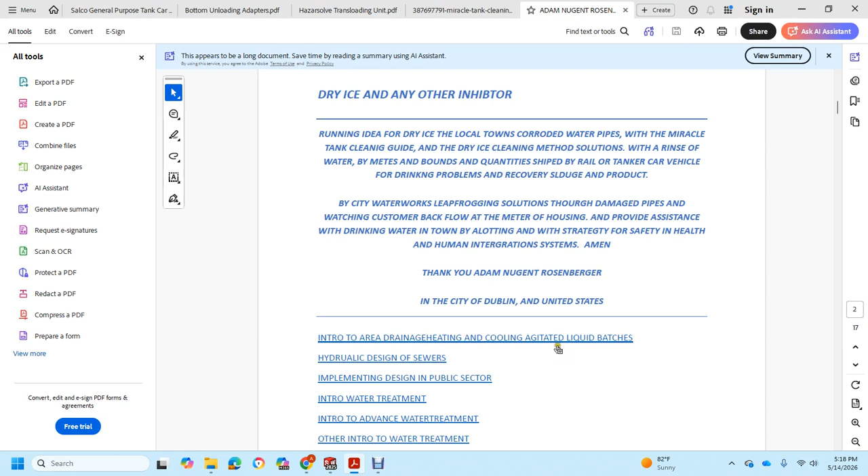Okay, so this is a way I built. It's a PDF, and it builds a web page out of your PDFs. But I have several different YouTube videos, like intro to draining, heating, and cooling, design sewers, implementation, design public sector, water treatment, advanced water treatment, seepage drain, treatment, disposal treatment, steam boiler, water system pumps, operation pipes, cleaning industrial water, flow measure pipes, ducts, and valves.

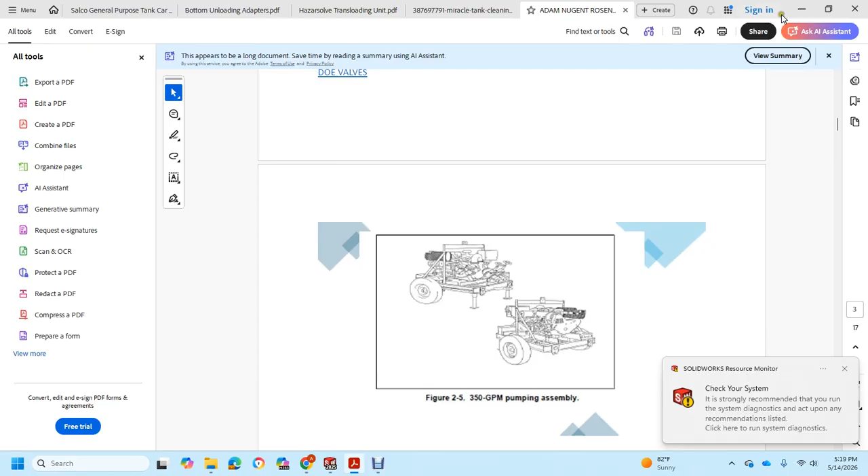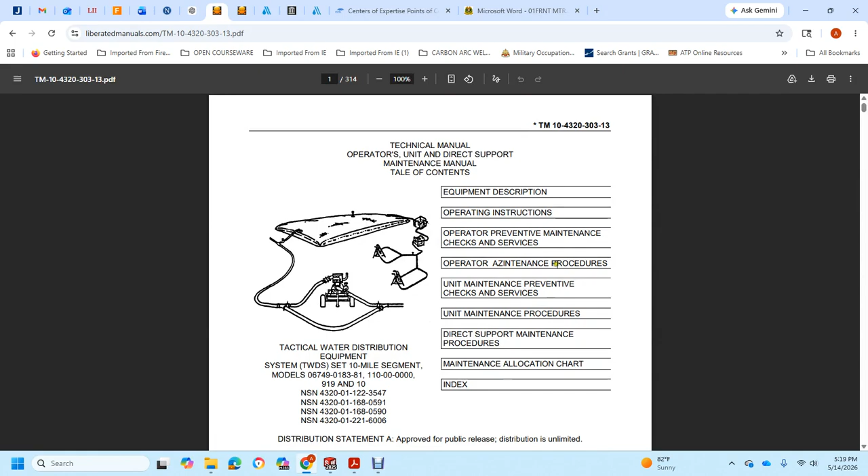So let's look at some of the pumps we have. I have my SolidWorks open. We'll go to the Liberated Manual, search for water pumps. As you can see, they have pumping units. Some of these are the page numbers on the side, such as water 600 gallon assembly, pumping assembly. We have a tactical 10-mile segment, water distribution system 10-mile segment, and so this would be leapfrogging the gridiron, and it shows a water kit for the operation instruction, preventive maintenance, operator maintenance, unit maintenance checks, appropriate design, distributed for public release unlimited, and we'll download that real quick.

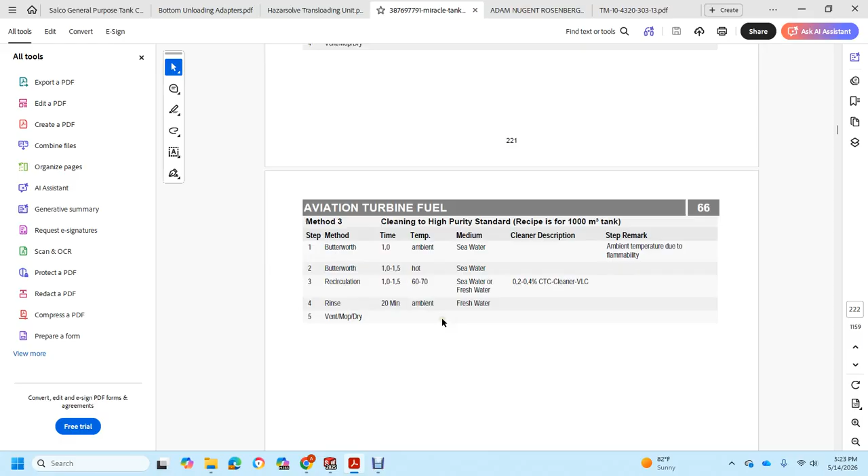So these are the cleaning agents. We have operation, fire, exits, reaction, emergency response, tank inspections, troubleshooting, zinc and viscosities, and more. So we look up the scale and corrosion control. We look up, say, let's do find text, what was it, carbon dioxide. That's what we want. I'm just going with this one real quick. We'll just leave that at carbon.

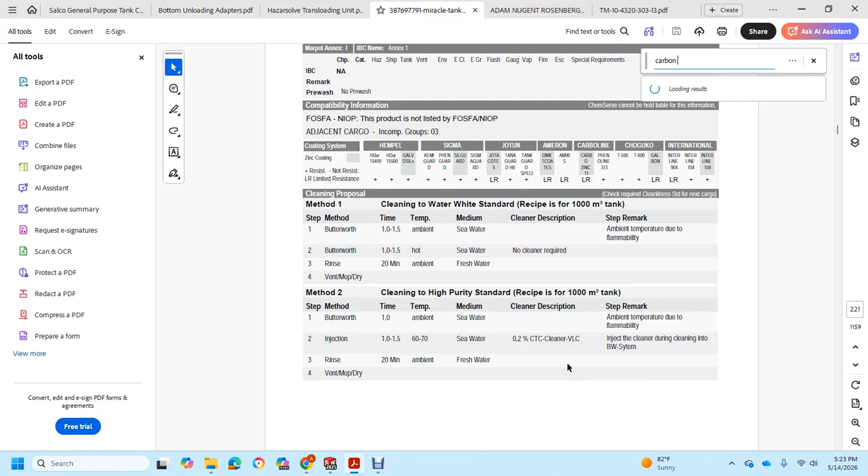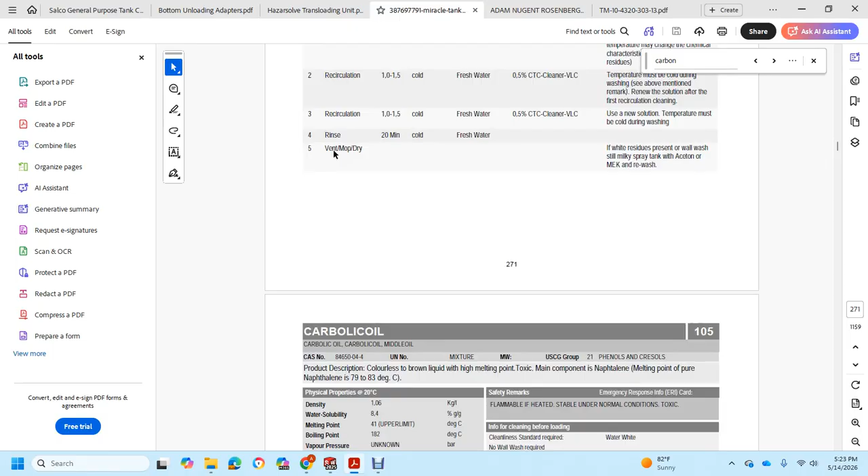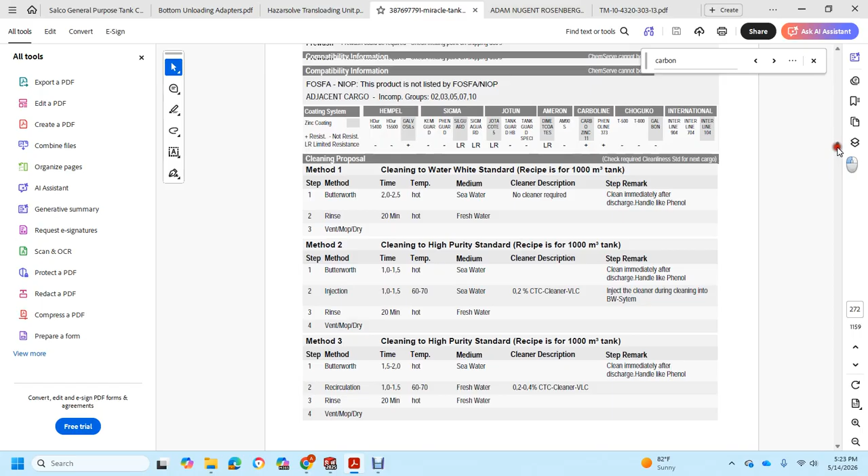Alright, so I didn't look it up, but I think we might have passed it. Carbon was spelled in C. Carbon, let's see, carbon tetrachloride, carbon dioxide. Anyways, it will show the CAS number, UN number, mixture, volumes, kerosene, shows the cleaning flash points, the hazmat, how much it takes to clean. These are the sheets. So there's Miracle Tank Cleaning. And I showed you the small, we'll go back over to this one.

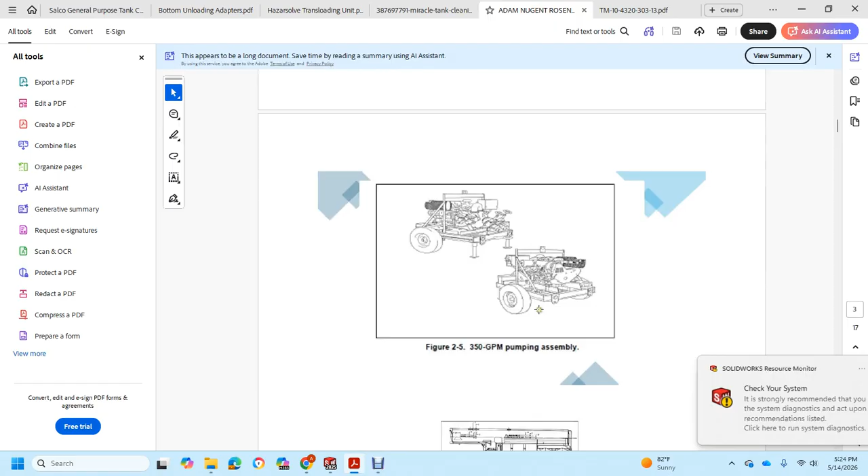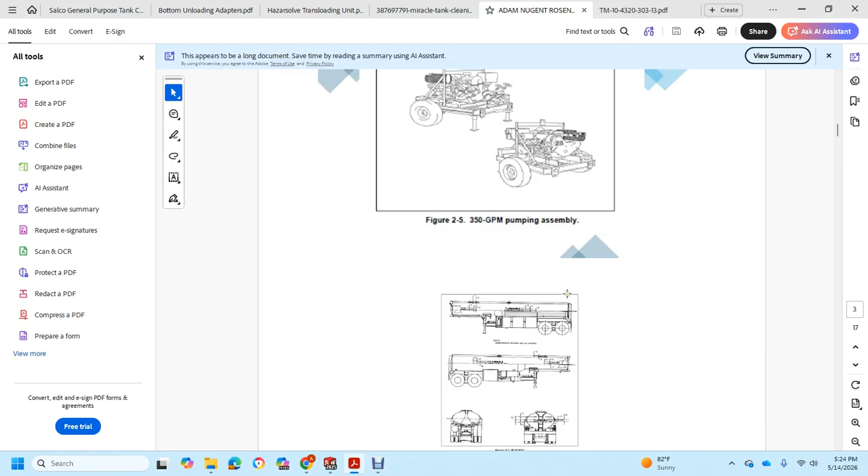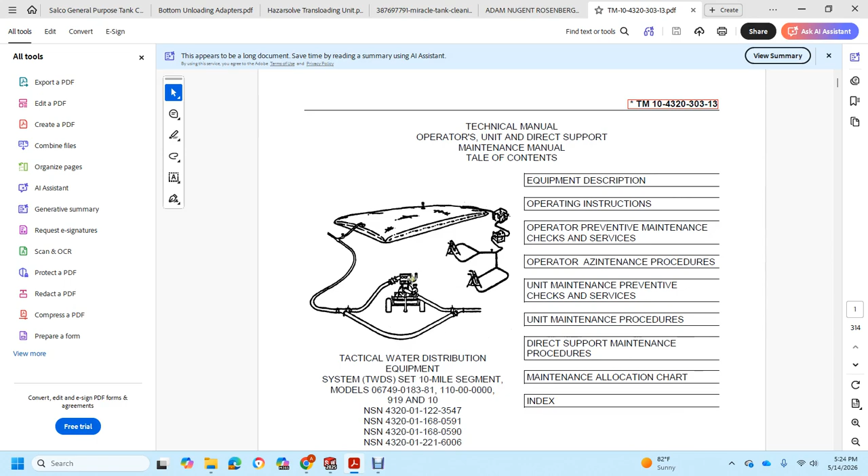There is a trailer with a pump on it with the corrosion bucket, and it pumps it in through your service line, and then you run the water through the service line as it cleans it out. And then you have something like the water test kit over here, purifying kit. And so let's look at the meter. So we looked at both the service line and fittings.

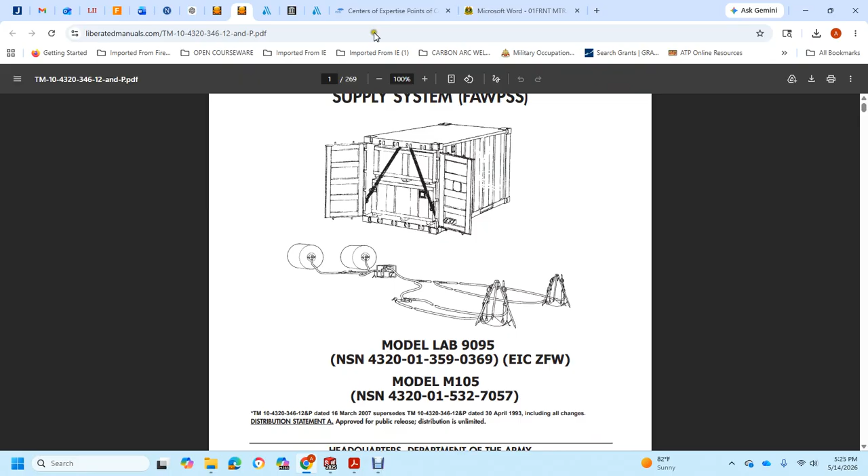And then I asked OpenAI, what is the rate of water into a house? It says 6 to 12 gallons per minute total household flow available. So 350 gallons per minute would be too fast. So we need something around a little bit. So then it shows that 1/2 inch would be 6 to 8 gallons, 3/4 inch 12 to 18, 1 inch 20 to 30 gallons.

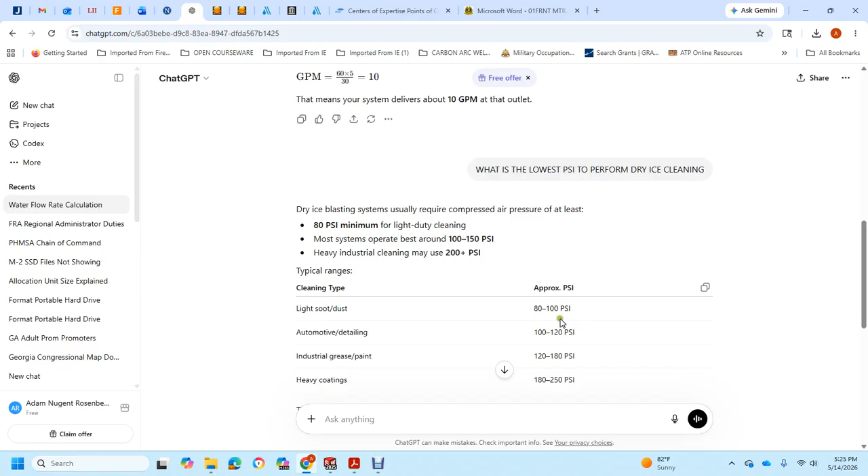Then I asked it, what is the lowest PSI to perform dry ice cleaning? And it says from 80 to 100 PSI light soot, heavy coatings 180 to 250 PSI, which was basically 80 PSI minimum. And up here it says water service lines commonly deliver around 40 to 80 PSI. Now, we could go look at, say, AWWA valves, and then we'll go to images.

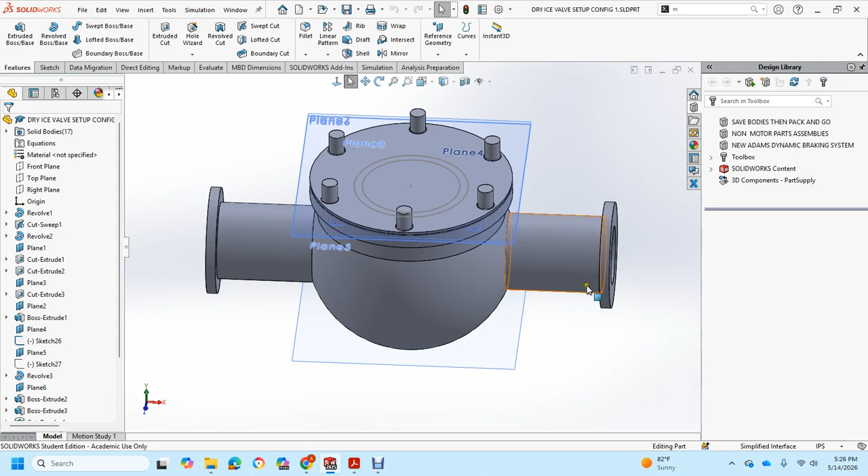Okay, so we're looking at something like this, the swing check valve. So over here, this would go behind the meter, and then up here on the top, I have a shitty generic drawing. So here's my drawing. Over here would be megalugs. It would connect into the system, and then we have a strainer inside. A strainer, and we'll pull this up real quick too. So it's kind of like a coffee pod. Then it will come up, and it locks into the seal. And you put the cover over it, and you put megalugs on it.

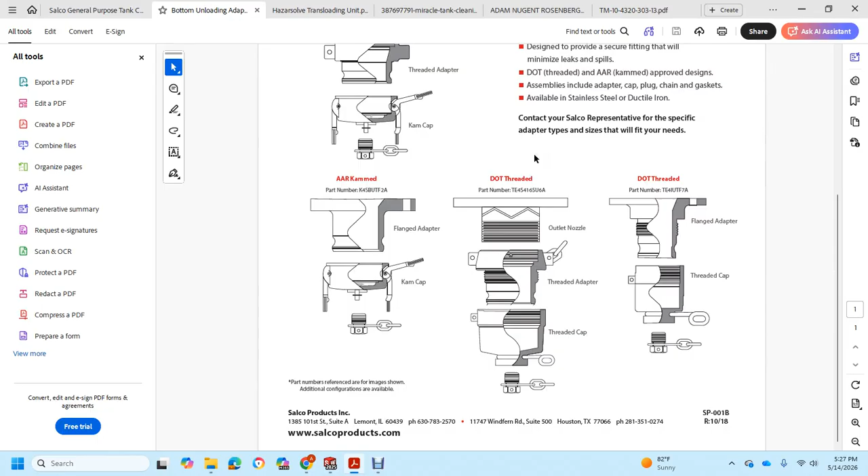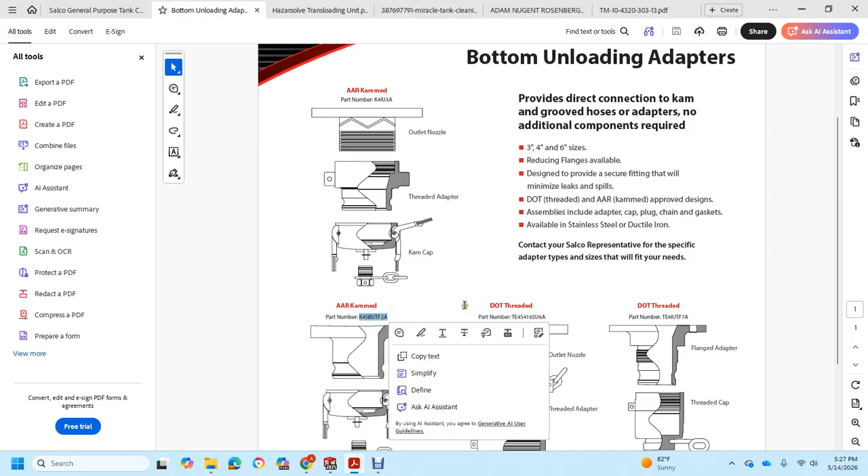And then on this point right here in the center, we would look at something like a bottom unloading adapter for tanker cars welded on the top of the valve. So these are already made. They have the part numbers right here, the thread numbers, so we could use tanker car parts. And we'll just close this one.

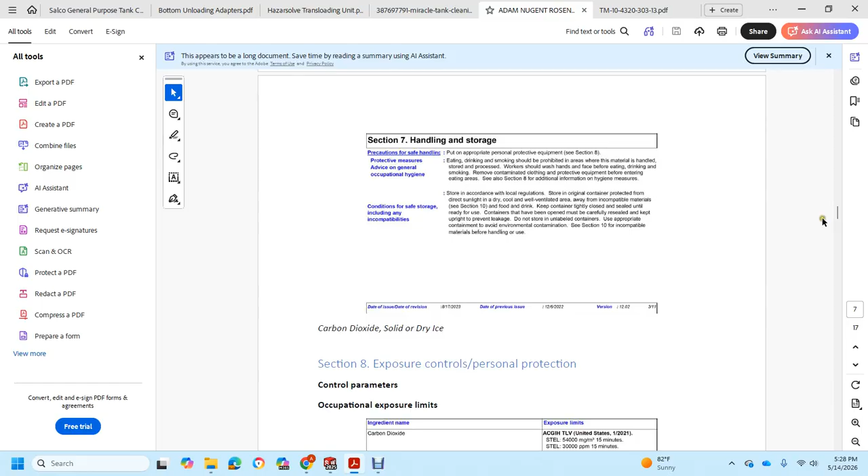Minimize, minimize. We're done with SolidWorks right now. And then we'll go back to here. We have bring in a tanker car, and then it goes over the composition of dry ice, identification, health effects, first aid for the rest of the 13 pages, and it's hazmat.

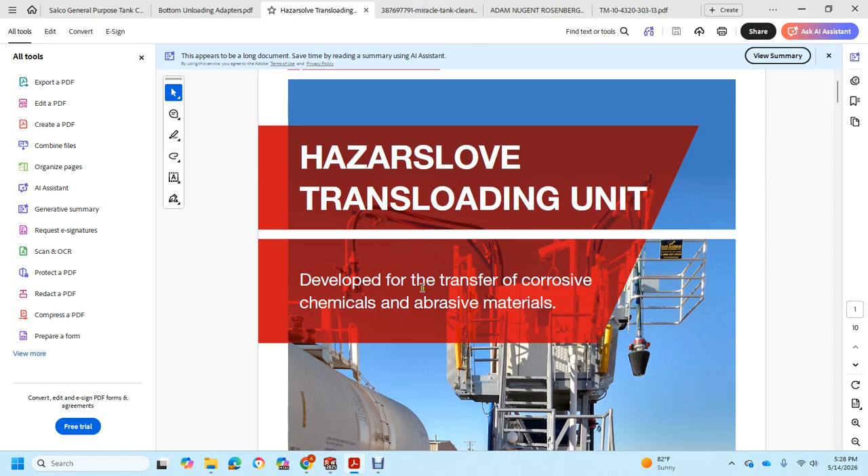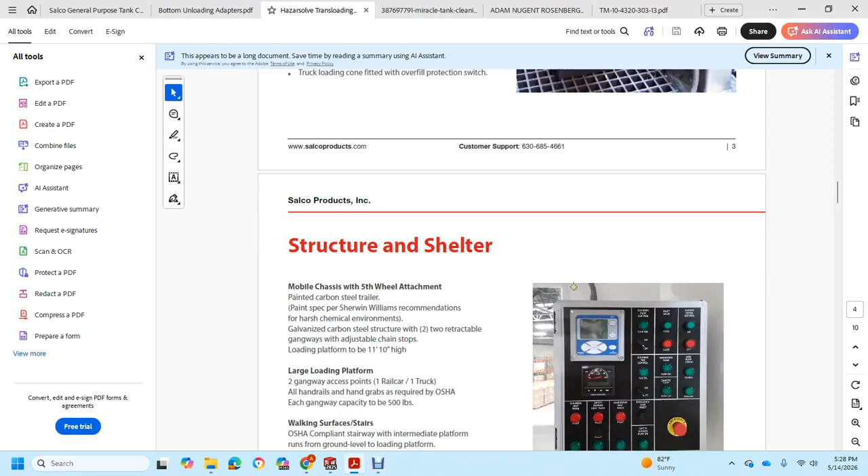So remember the corrosion. Now here is something they're doing with tanker cars. This is the Hazarsolve transloading unit developed to transfer corrosive chemicals and abrasive materials. And this is a Salco product. And then we're using the bottom loading adapters welded onto the valve so we can hook it up with a car or a pump. We would see the transfer system come in piping. It would deliver the pipe, and then it has a shutdown system gateway.

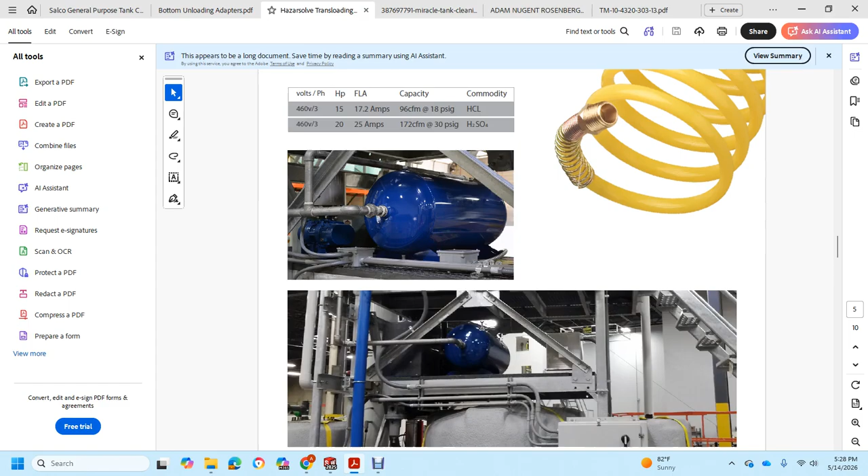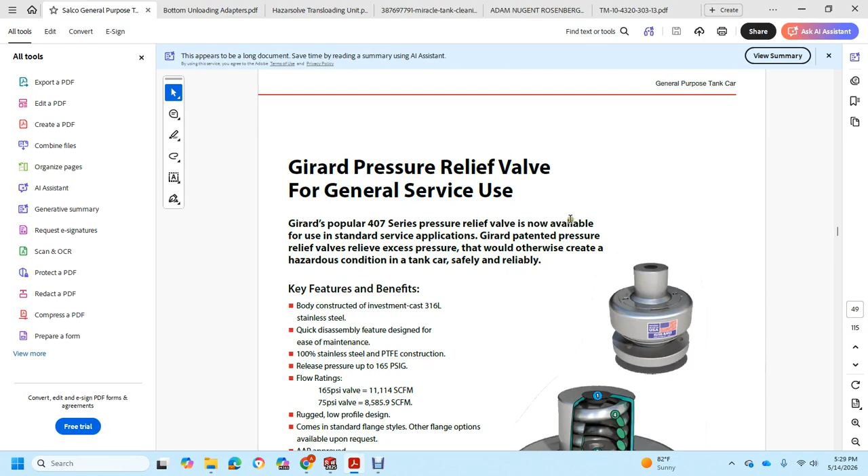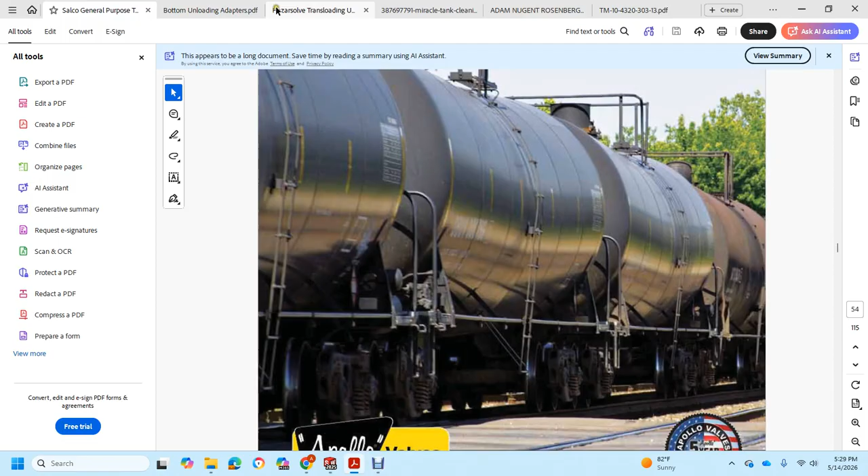For instance, this is pressure relief valve service. So here's different valves. Like I said, we would bring in the tanker car, either transload it or a trailer water pump geared down to about, I don't know, 12 gallons per minute, and flush it in through the service line, keep the water on for a certain amount of time, test the purification, then move on. So we have the bottom unload unit loading. This is welded to the top of the filter.

And then, let me see if I've missed anything. We did liberated manuals. What is this one? Executive orders, pump assembly TMs, liberated manuals, water supply point, carbon dioxide, dry ice as well. We'll go back. Once again, the source, we have filtration, softening, disinfection, scale and corrosion control. And then over here, we have a water operator field guide. You have to borrow it. That's on archive.org. Service line fitting, center of expertise, Microsoft Windows, water quality, purification system, and valves.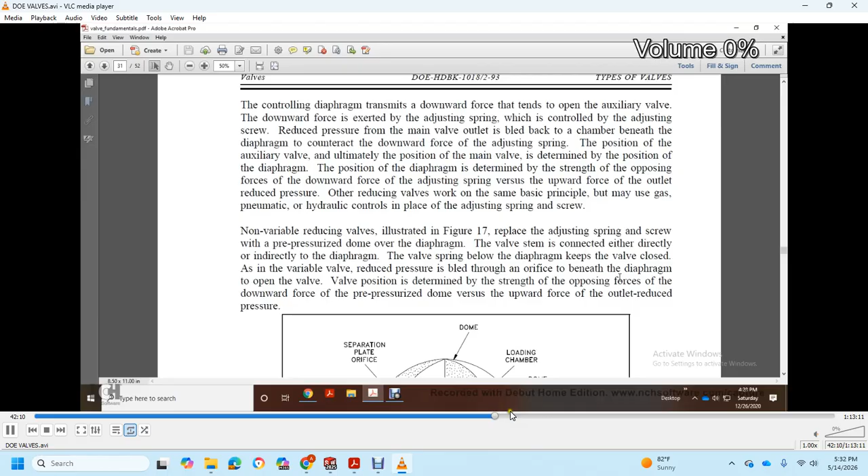So we have chemical cleaning, industrial. Forget about the highway, DOE, and Department of Energy valves. This one is a 52-page book by the Department of Energy. They have different types of valves. Let's see. This one is a weirder valve. It is a non-variable reducing valve. So if you don't get the valves, you can figure it out.

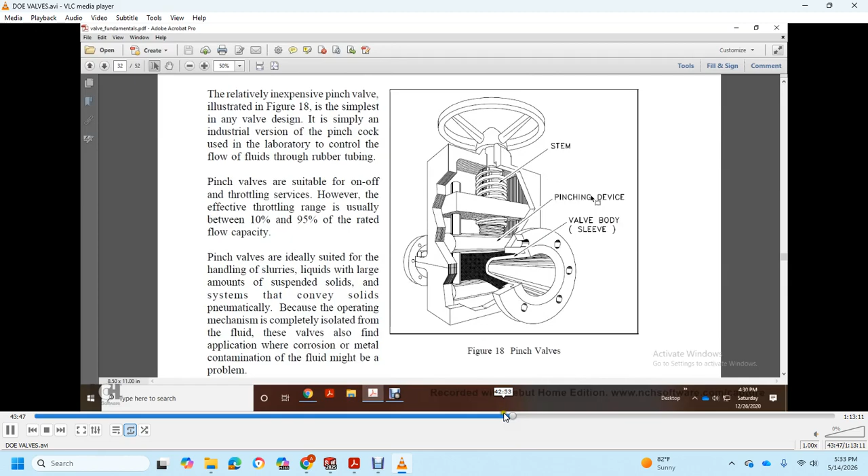We also have petroleum drainage systems, advanced water waste treatment, water makeup, implementation design, public sector, which is what we want to do. We want to implement these ideas and put them into the public sector. So enjoy.